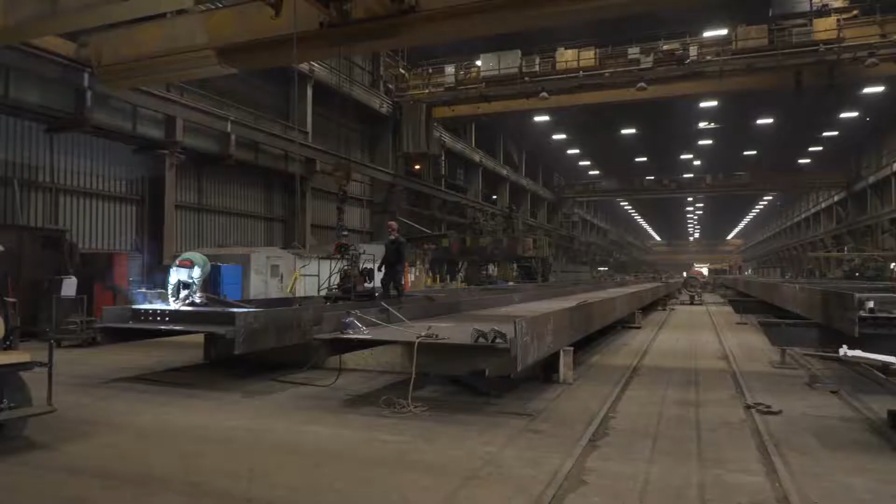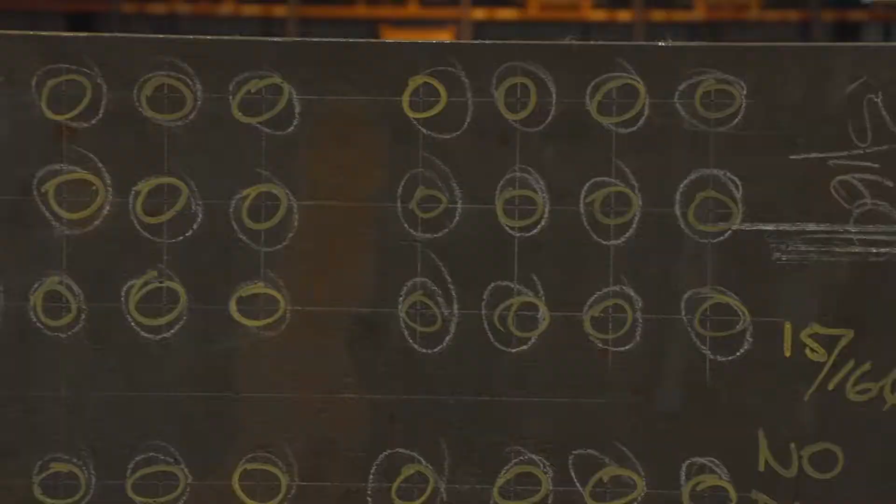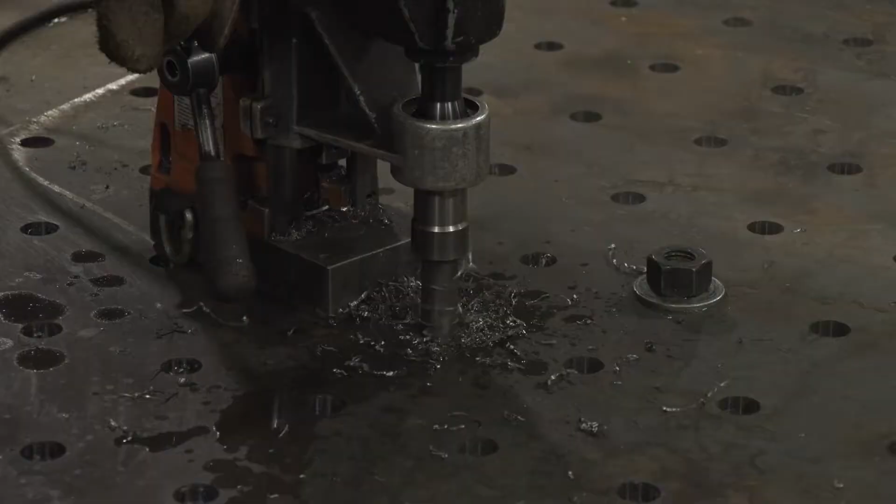Prior to the introduction of Ficep's Enterprise Gantry drill, bridge girder fabrication had remained unchanged in many respects since the evolution from riveting to high-strength bolting. Typical girder fabrication started with manual layout of all hole and stiffener locations. Holes were generated by manually positioning magnetic drills and then drilling each hole one at a time.

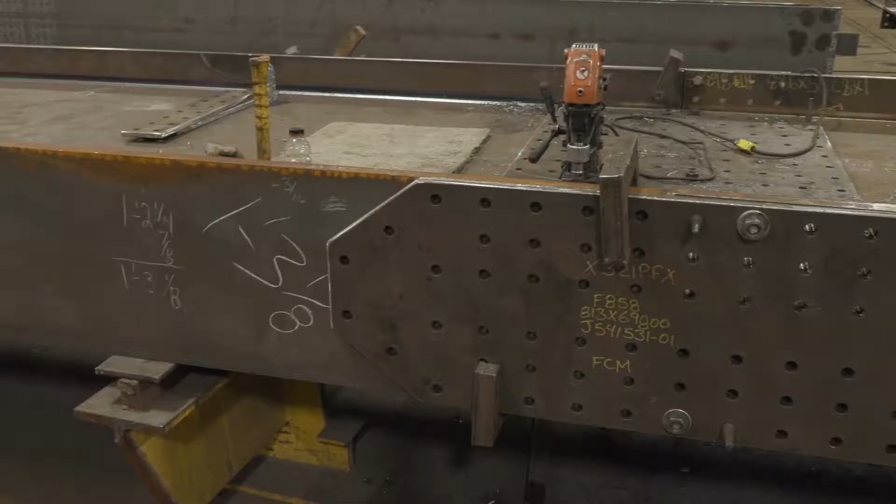Once the end connection holes were drilled and the connection plates attached, the next girder would be manually put into the ultimate erection position relative to the first girder. This is done before the end connection holes in the second girder could be located and manually drilled.

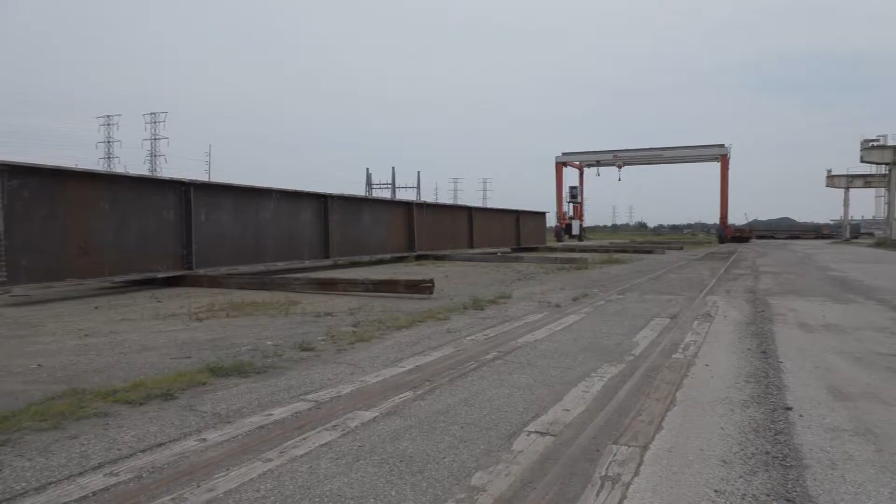Traditionally, the challenge to automate the drilling process of welded bridge girders was that they were not always fabricated as designed because of weld shrinkage. Their total length further compounds this challenge. Ficep has incorporated many unique and innovative machine and software developments to address this challenge.

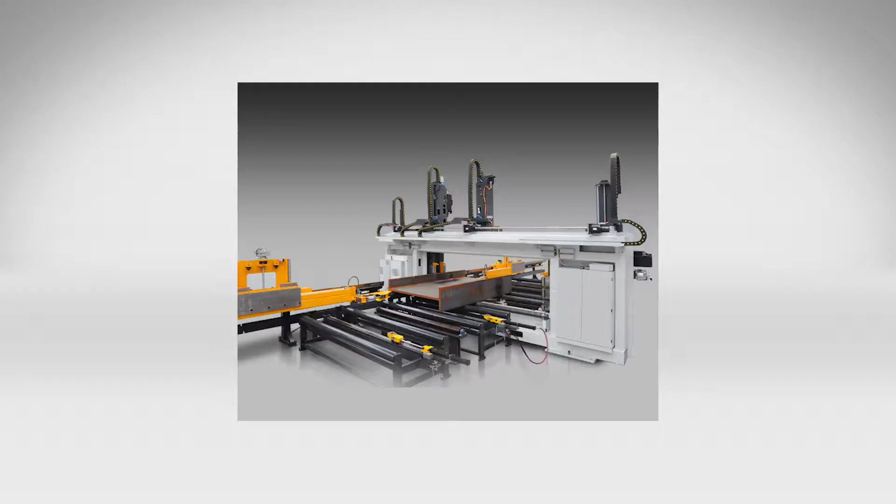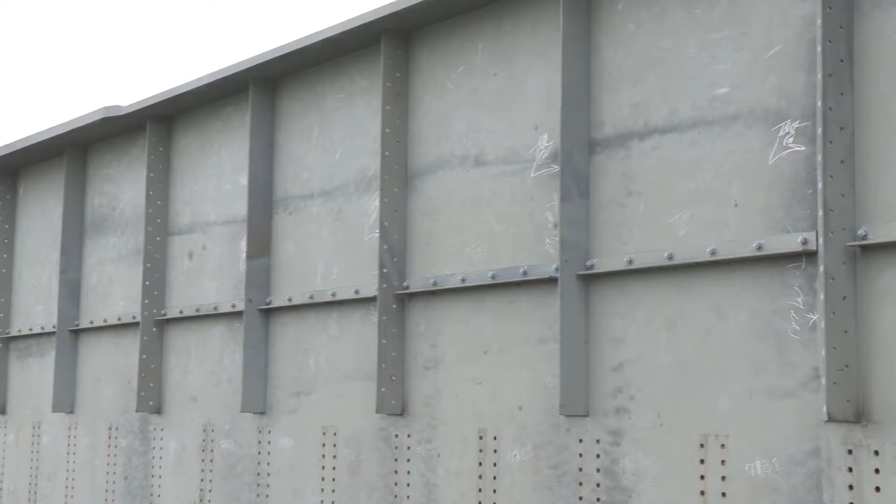The production of girder drills is not new to Ficep, but the pull-through design required an extensive footprint to accommodate both the entry and exit conveyors. In addition, as welded girders frequently have differing flange heights along the length, they are not always conducive to conveying through a traditional drilling line.

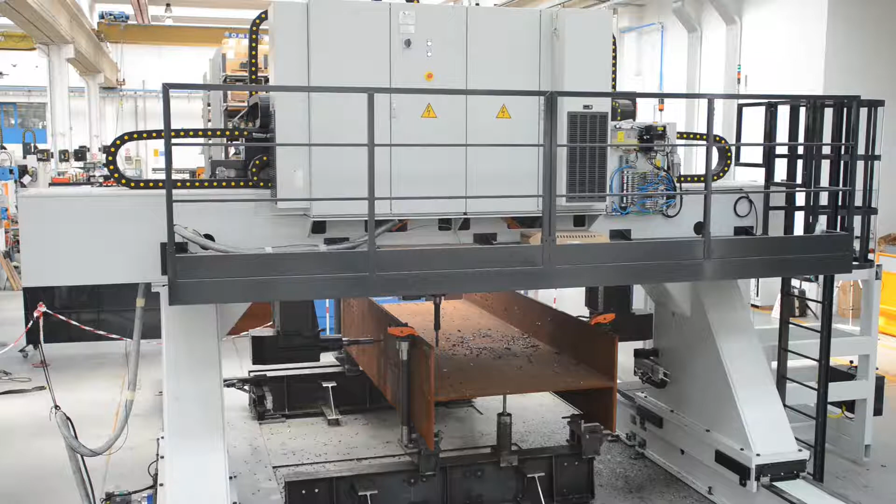In contrast, the Enterprise Gantry drilling systems from Ficep process girders that remain stationary. The Enterprise Gantry drill travels the length of the weldment to drastically reduce the system's required footprint. As the gantry system has no datum or reference points, the welded section can be positioned anywhere along the processing envelope.

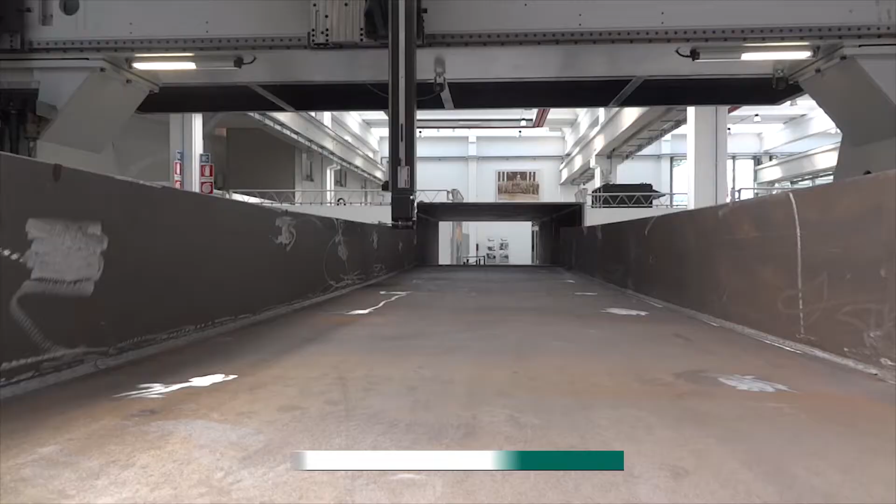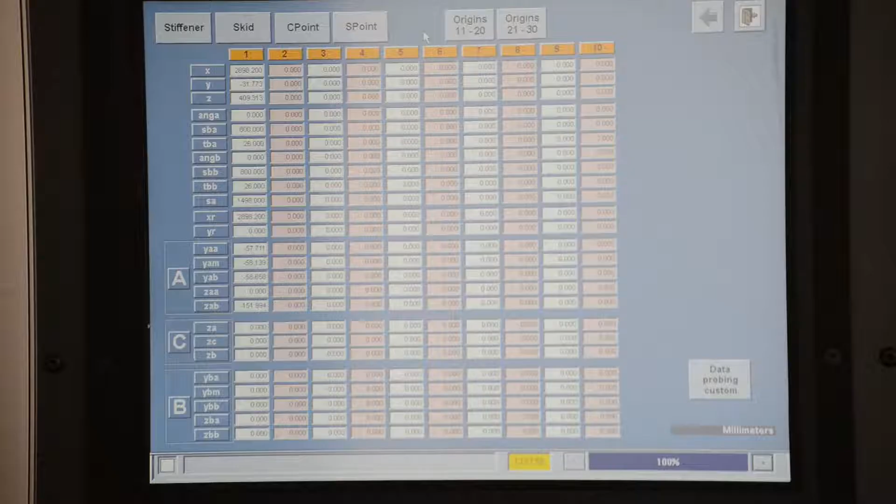Once the member is loaded on the gantry bed, laser technology is used to scan all relative surfaces and end locations. Once this probing data is completed, the part program is automatically oriented and modified to the actual location and size of the welded member.

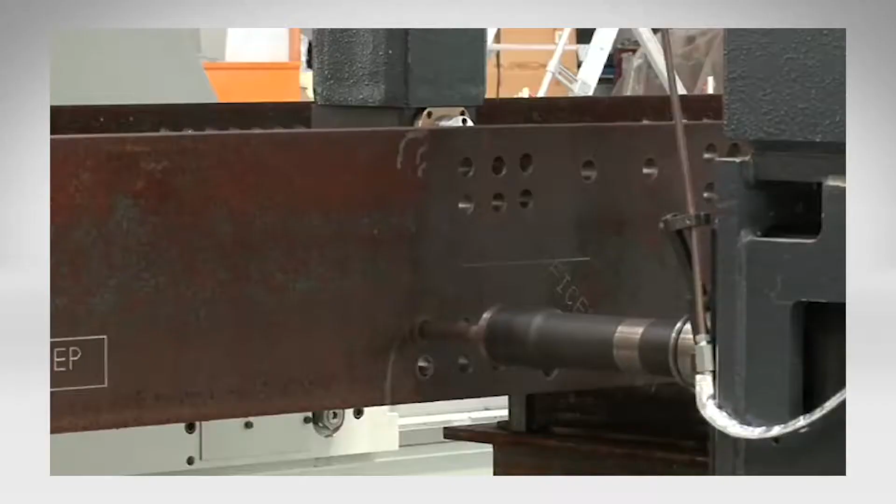The Enterprise Gantry drill features direct drive 31 kilowatt spindles that deliver 100% of the motor's power to the tool and can generate spindle speeds of up to 5,000 RPMs. This spindle design, with its full power delivered to the spindle, permits the utilization of today's high-performance tools for milling,

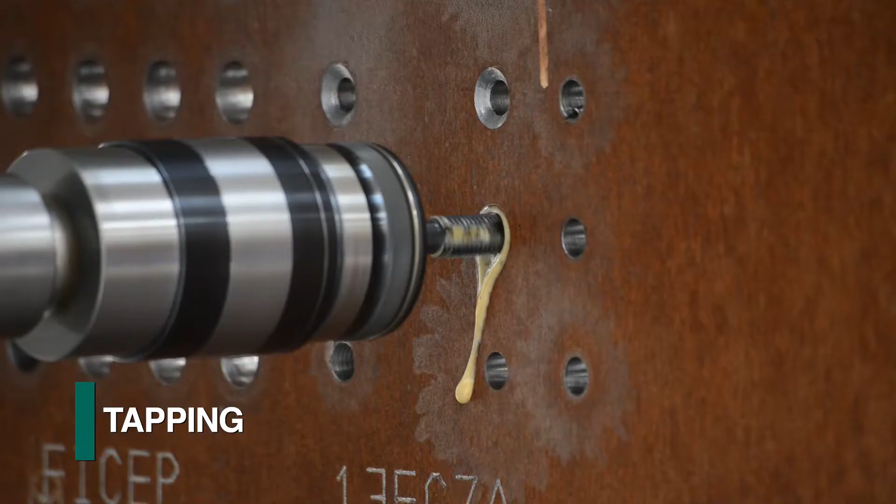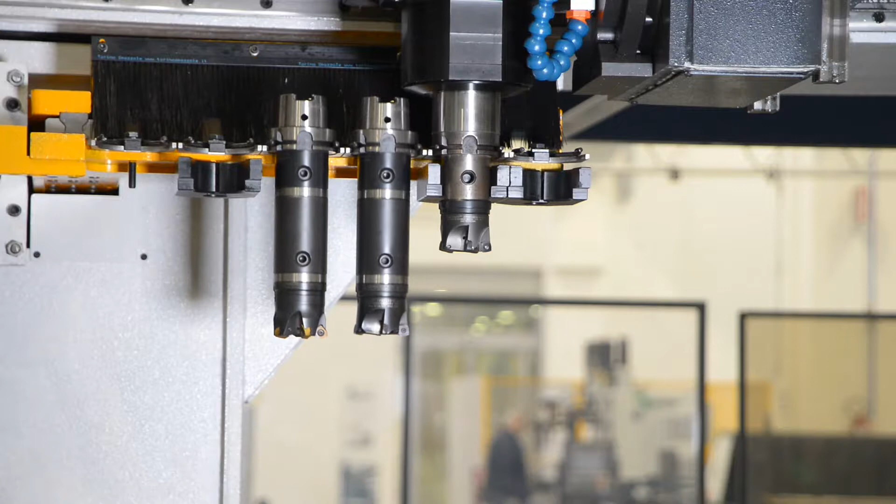drilling, tapping, and countersinking. Each spindle is provided with a 6-position automatic tool changer to accommodate a wide range of tools for typical welded section fabrication. Typically, the hole patterns between the flanges and the web do not share the same length coordinate, as the girder does not need to be positioned to a fixed datum.

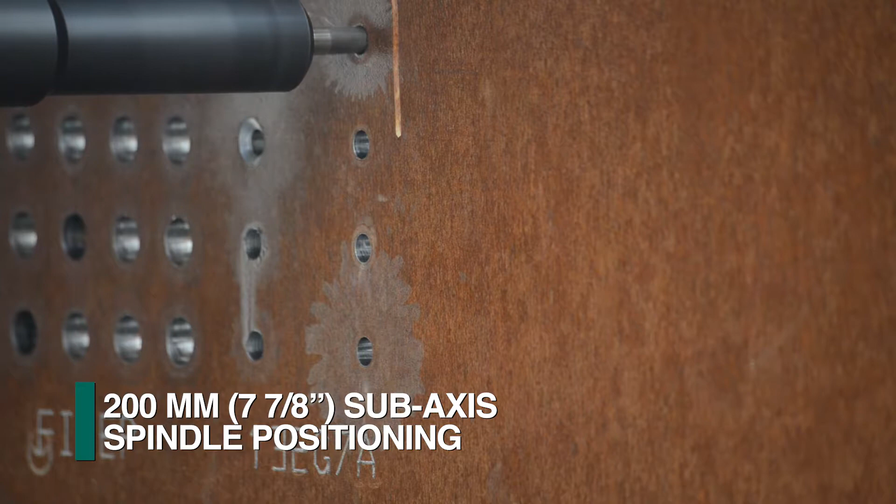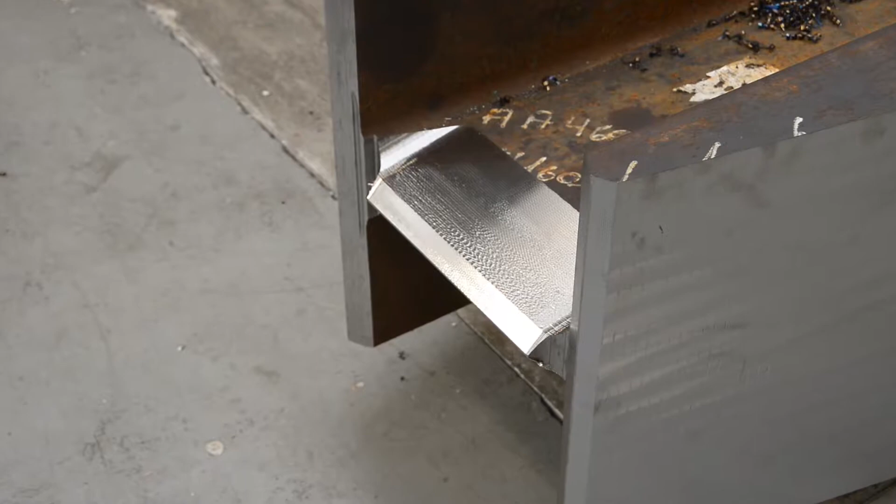The Ficep Enterprise Gantry drill features a 200 mm sub-axis on each spindle. This feature enables typical hole patterns, scribing, or milling in all surfaces to be processed simultaneously, even if they are not in line. Hole sizes exceeding 50 mm can be milled to the required diameter.

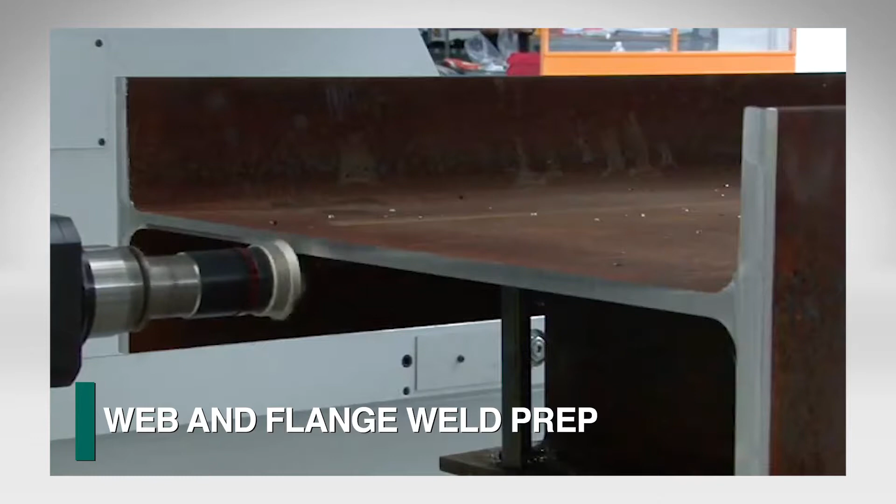Typical web preps can also be generated by milling the web and the flanges by using proper tooling. Rat holes can be milled easily to complete the end preparation. This sub-axis capability makes the Enterprise Gantry drill well suited to perform milling operations, as just the spindle is active in multiple axes while the part and gantry remain rigidly clamped.

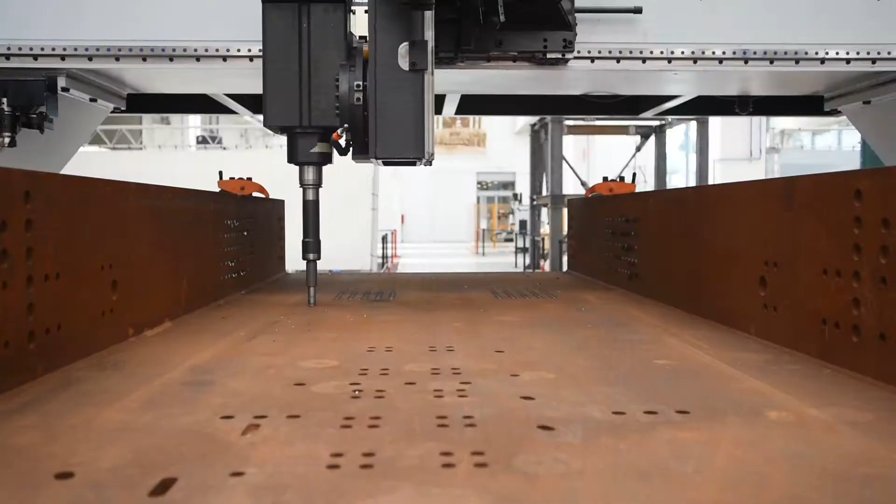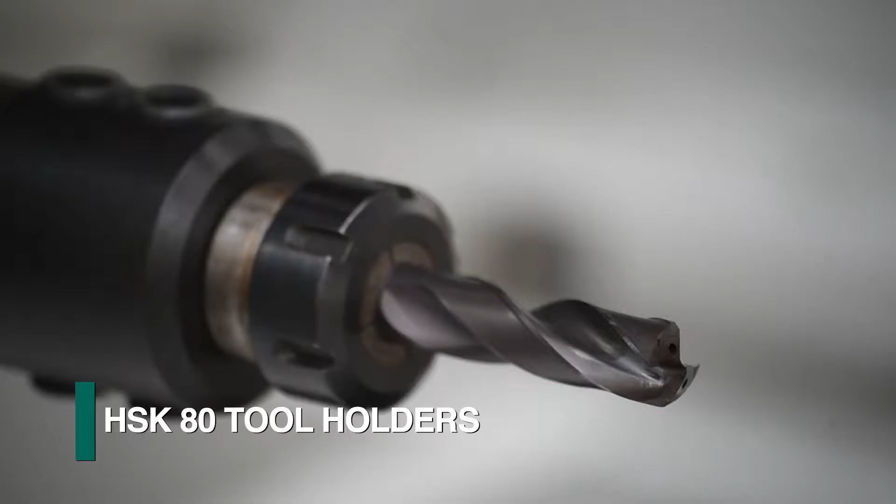This is also essential for scribing operations to eliminate manual layout of attachments, such as stiffeners, for subsequent welding. Deeper scribing can be generated for part identification visible after painting. Rugged HSK80 tool holders are part of the system to address multiple milling applications. This capability further enhances the diversity of tasks that can be accomplished for large, heavy, and uniquely shaped parts.

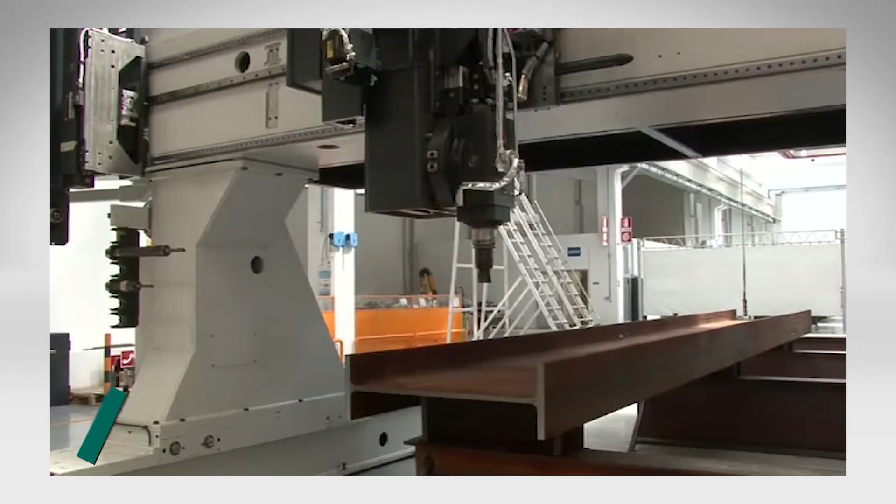The vertical spindle has the innovative capability to articulate to any one of 3 positions. This feature expands the gantry's capability to process up to 5 surfaces to address such applications as end milling.

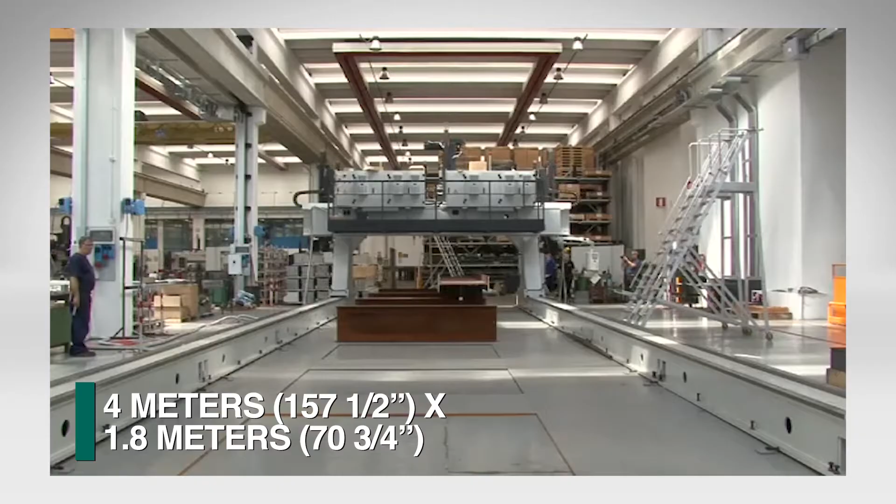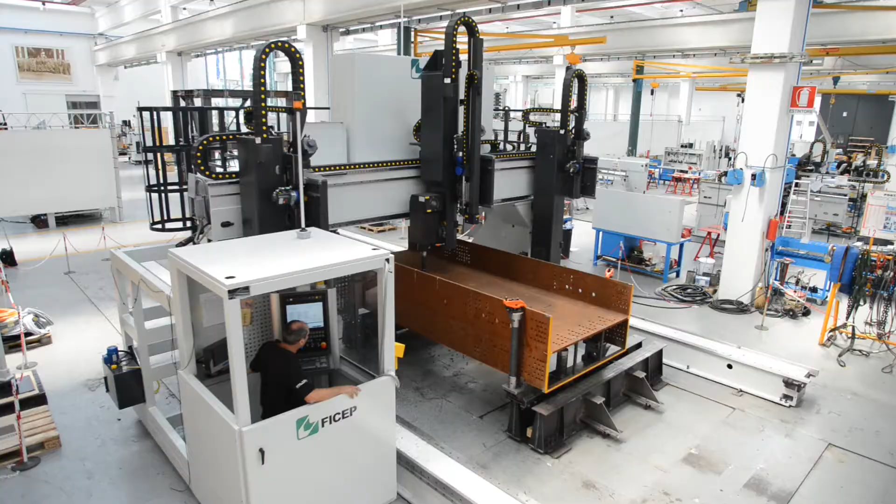The Ficep Enterprise Gantry drill systems are available in different envelope sizes, ranging up to 4 meters in width and 1.8 meters in height. Its expansive capabilities have the ability to address the processing of large, heavy, and uniquely shaped welded elements. These weldments may not conform to processing through a line where the part must be transported on a conveyor line. The FICEP Enterprise drill line, with its industry-leading innovative technology, enables new labor-saving capabilities that were previously not available.